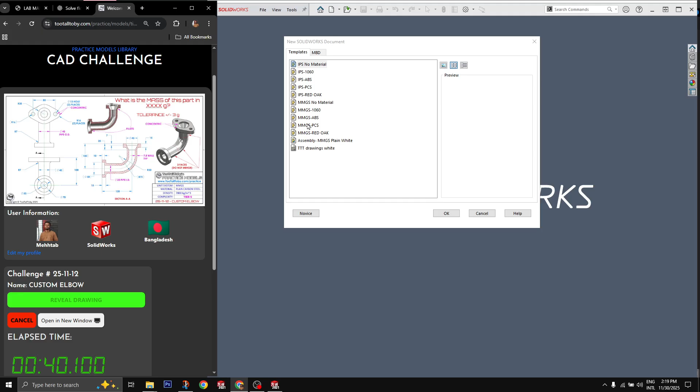So let's begin. This is mmgs plain carbon steel. I have my template ready. We will create this according to our game plan.

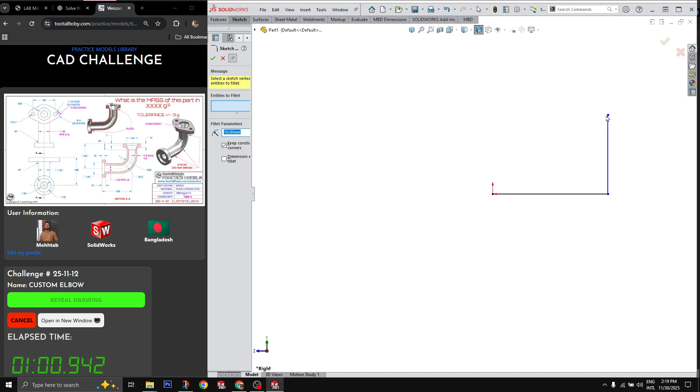Let's choose the right plane and draw first the path for the pipe. This is a pretty simple path. Let's draw a reversed L shape and add a fillet, then cut the radius, delete the radius, and select all of these.

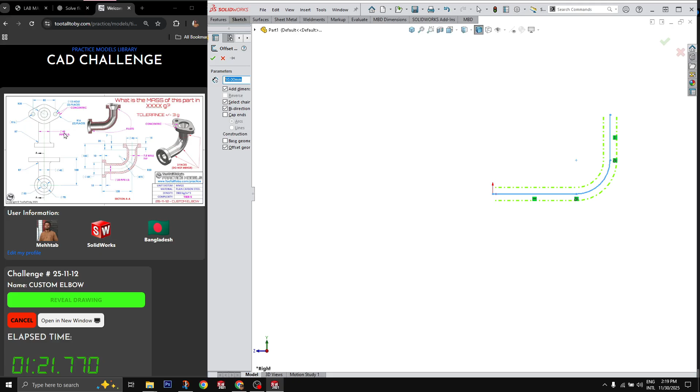Click offset, bidirectional, offset geometry will be construction, and each side shall be the radius of the pipe. From the front top view we can see 40 is the diameter, so this should be 20. There we go, now we just need to fully define the sketch.

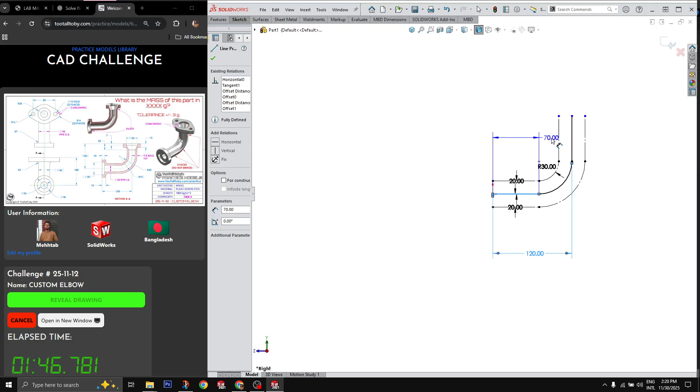This arc is given as 30. From the center line to here it's given as 120, and the height from the center to the very top is 100. There we have a fully defined sketch.

Let's exit the sketch, choose the sketch, S key, sweep boss base, then go circular profile and choose it to be 40. There we go, now we just need to add the flanges.

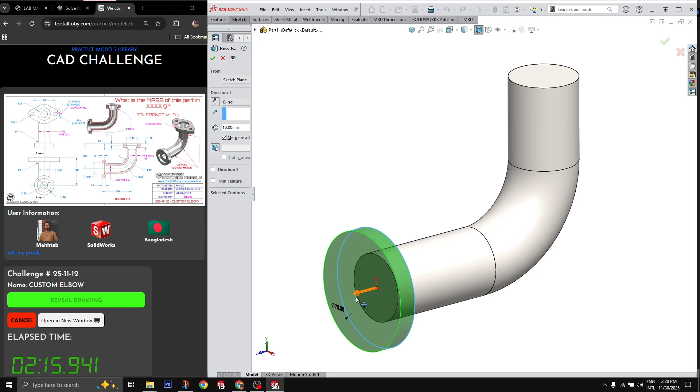Let's deal with the easy flange first. Here it should be 70, goes inside to a depth of 15.

Now we are gonna deal with this part, this one's a bit tricky. At the center it is 35 times 2. Let's go here 40, half of 80, and create another circle of 32 as the radius is 16.

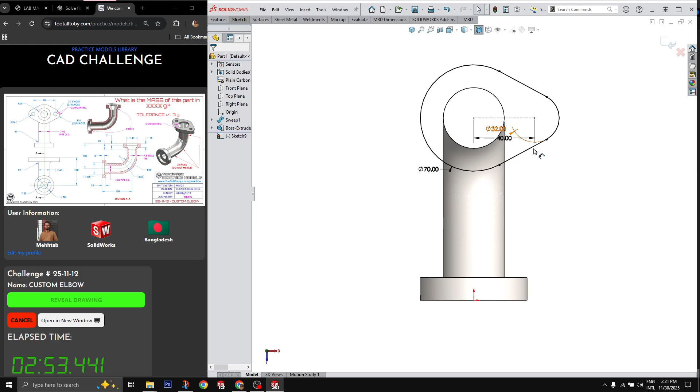Then we just need to connect this, make them tangent, then mirror it across the center line. There we have it, we can even delete these stuffs, and we can extrude it downwards 15.

Now we can easily mirror it across the right plane and then create the necessary cuts.

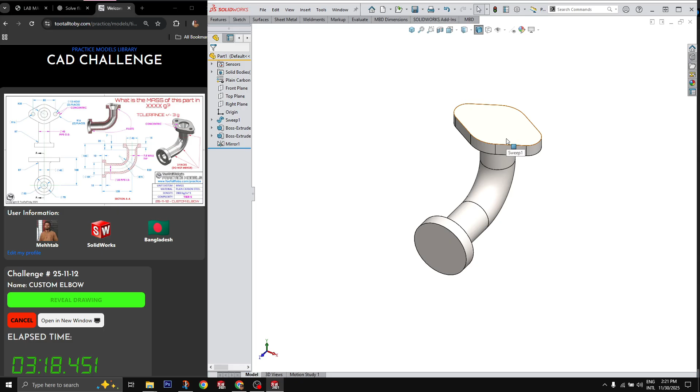This cut is not that hard. I will choose a different approach for that one, but first let me create the easy cut of 50 goes 10, 50 goes 10.

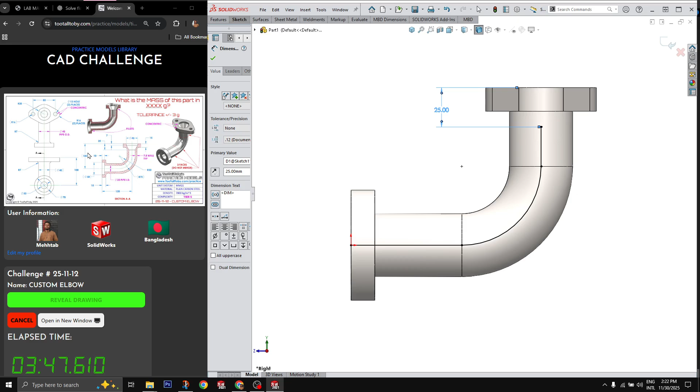Let's create in the right plane another sketch. Let's convert the first sketch and trim it out a bit, then dimension it 25 as shown here. I will show you why I did this a bit later.

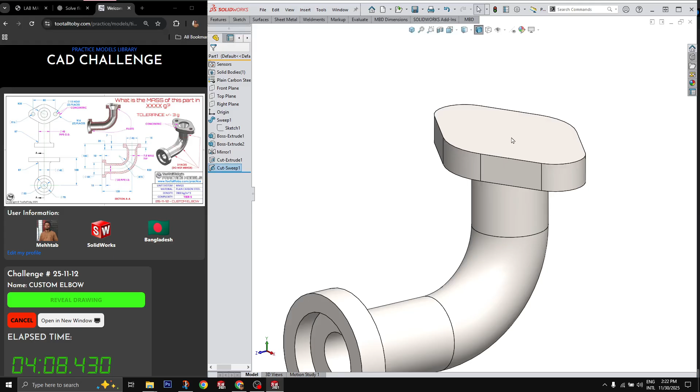Now exit the sketch, choose the sketch and go for sweep cut. Similarly choose circular profile, and the whole diameter is 25 inner diameter. Now from here let's go for a cut of 45 going 7. From this view we can see it.

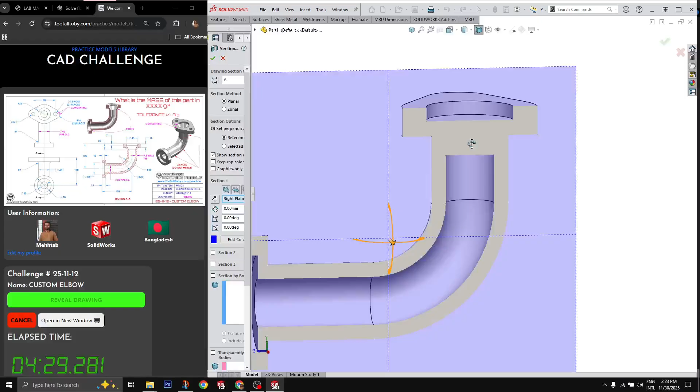Now is the tricky part. If we create a section view in the right plane, we can see that there are two profiles here, this face and this face.

We can actually create something like a lofted cut here. Let's try it. So S key, choose lofted cut for this face to this face.

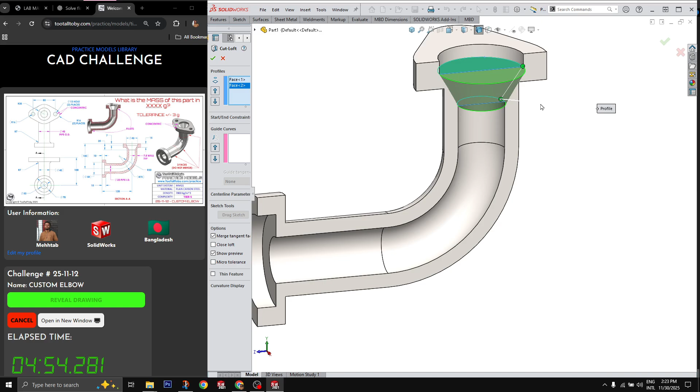There we go, but this starting points should be correct, otherwise it won't match. So let's just keep it at the ends as perfect as we can. It doesn't matter too much. Then we can actually hit OK and it will be cut just the way we want it to.

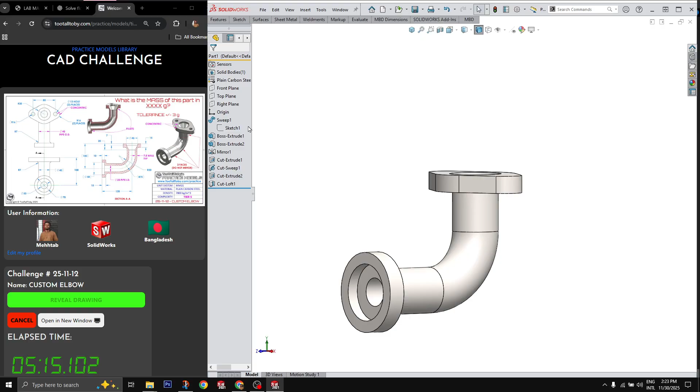Then we can go here and we can see a nice section view. It's exactly what they are showing us here.

Now all we are left with are those fillets. So a fillet here and a fillet here of radius 7, I believe. And that is it, our drawing's done.

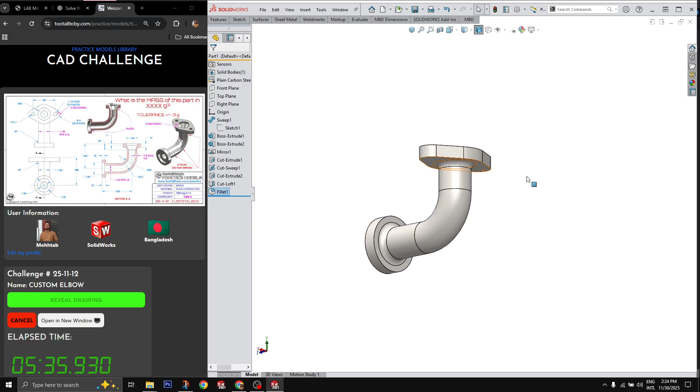Let's check the mass. 1745.96, I believe it's correct. Let's check it. No, it's not correct. So mm, it's not actually correct.

So yeah, if we are not correct the first time, we still have a chance to rectify our mistakes. Let's check where we did wrong. First things first, we will check the isometric view.

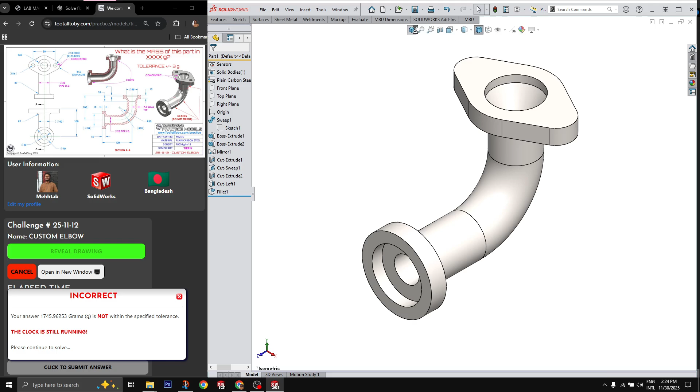Yeah, we are missing those two holes. Immediately I saw it, so it's 13, two places. Let's cut it out. I believe there are no other mistakes because we did everything very sincerely. 1714.9. There we go, it's correct now.

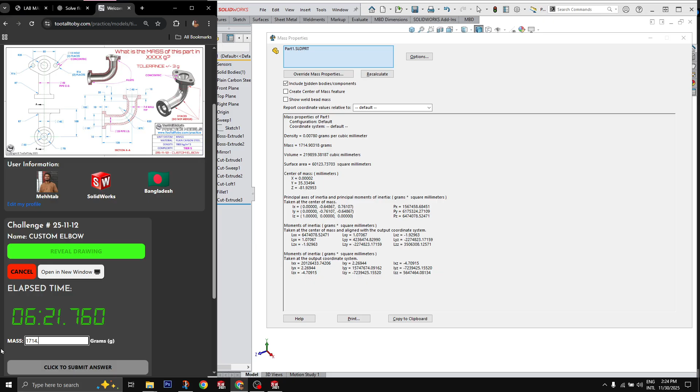It took us 6 minutes 22 seconds for this tier 5 challenge. I'm pretty happy with it.

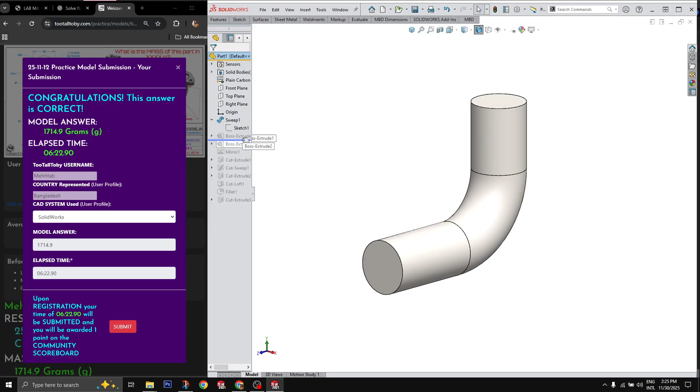So basically, these kind of pipe-like models are pretty easy with sweeps. Every time we see some simple pipe like this and flanges, simply draw the inner pipe profile first, then go on with the flanges and those other features like cuts and holes, etc. That does the job pretty nicely.

Yeah, cut loft was overkill, we could have just revolve cut it, but I just wanted to show you that this is possible and this might be something we use in speed modeling scenarios because the revolves are very slow.